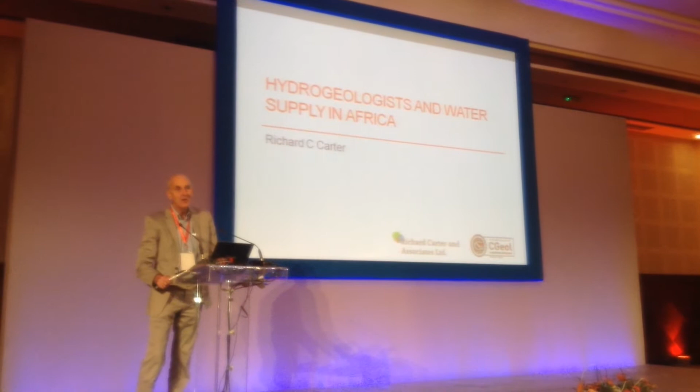Imagine a Minister of Water in Africa, or perhaps a Minister of Finance, or maybe both, asking you all: what is all this, all these posters, all these presentations, what relevance do they have for improving practice and improving policy in my country and in my district? I'm afraid you haven't got either of those people, you're stuck with me, but I'll try and represent them a little bit.

I do find myself rather humbled by the sheer volume of science and experience that we're all surrounded by. And as I get older, I realise how little I know and how the little I know seems to get smaller every day.

Many of the discussions that I've been having so far have reinforced that there are many things that we really don't understand about groundwater, and that makes it quite difficult in some cases to draw out the implications for practice and policy. But that's what I want to try and do, to make some links between the science of groundwater and practice and policy. Sometimes I talk about it as practice and policy in that order, and sometimes policy and practice. It's never quite clear which drives the other.

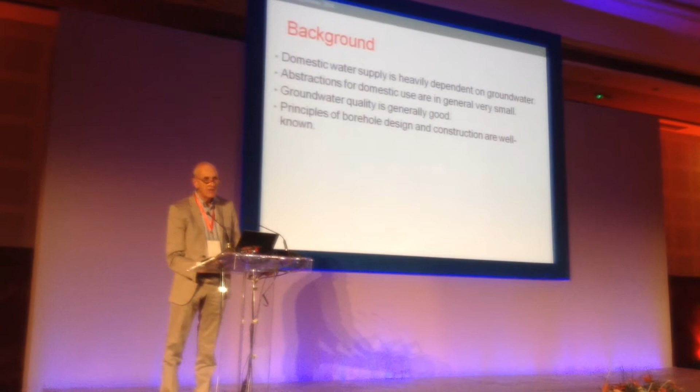In the previous version of this presentation, I had a little animal appearing at this point. We have an advertisement on British television which features a meerkat, you know, one of those little South African animals, sticking its head up and saying, "Simples."

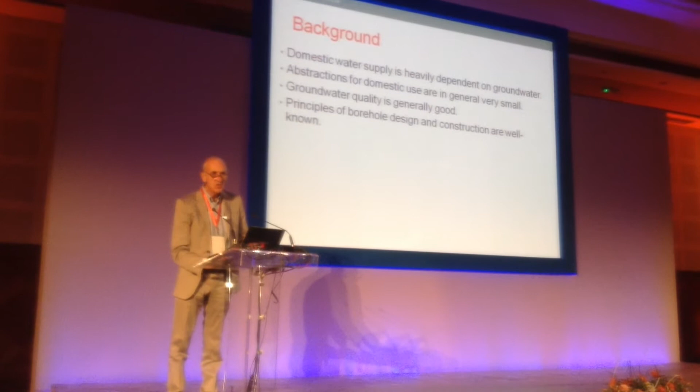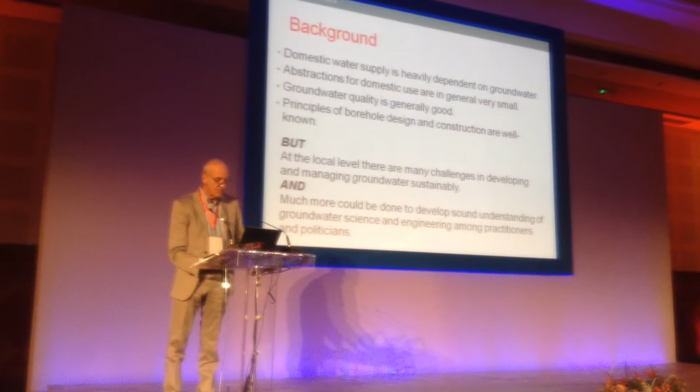It should be simple. All these things are in place, but there are a lot of challenges in developing and managing groundwater for domestic water in Africa. And I think we can do a lot better in communicating groundwater science and improving engineering practice.

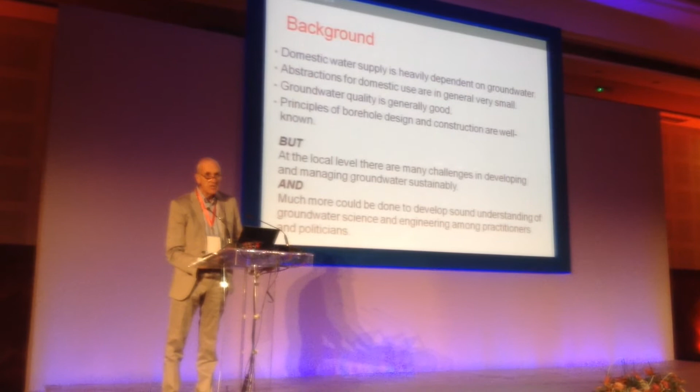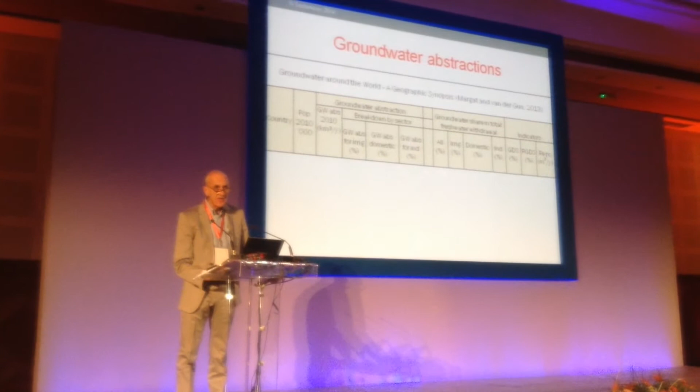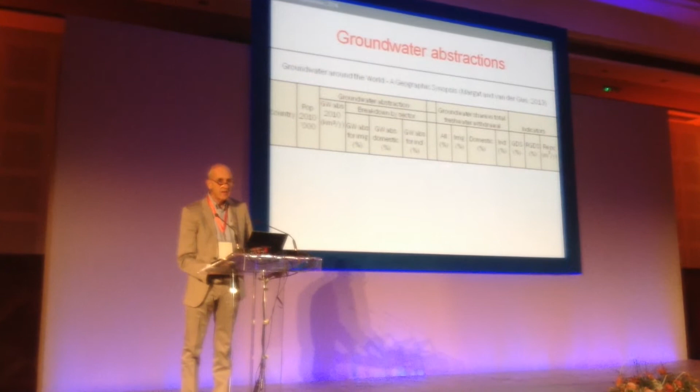A recent publication by Jean Margat and Jacques van der Gun has tried to pull together some data on groundwater abstractions, country by country, breaking it down, disaggregating groundwater abstractions by sector, irrigation, domestic water and industrial water, and examining each of those as their proportion of total freshwater withdrawals, and adding some indicators to do with renewability of groundwater.

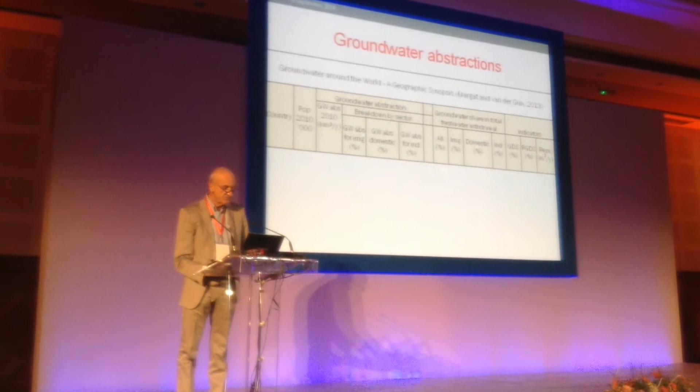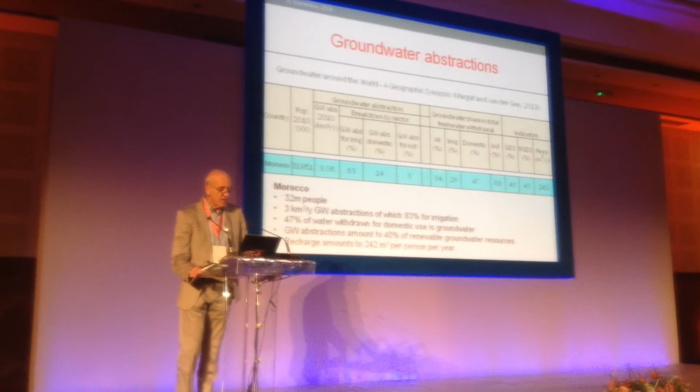As an example here, Morocco, let me just summarize some of the data from Morocco. About 32 million people, extractions of 3 cubic kilometers per year, or thereabouts. More than 80% of that is for irrigation. 47% of the water withdrawn for domestic use comes from groundwater.

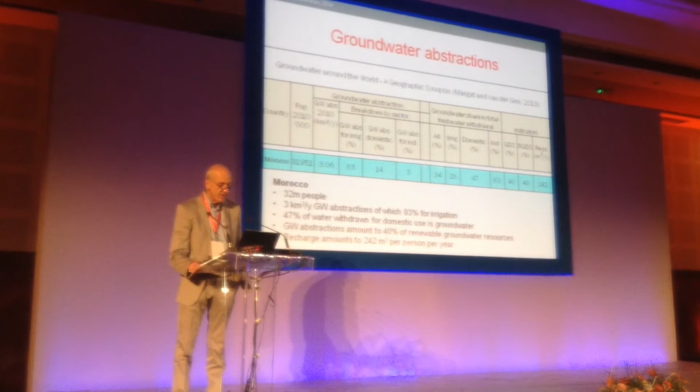And over towards the right-hand side, the groundwater development stress, the GDS figure, 40%, groundwater abstractions amount to about 40% of renewable groundwater sources nationwide. Of course, once you get down to basin level, we're talking of a different situation.

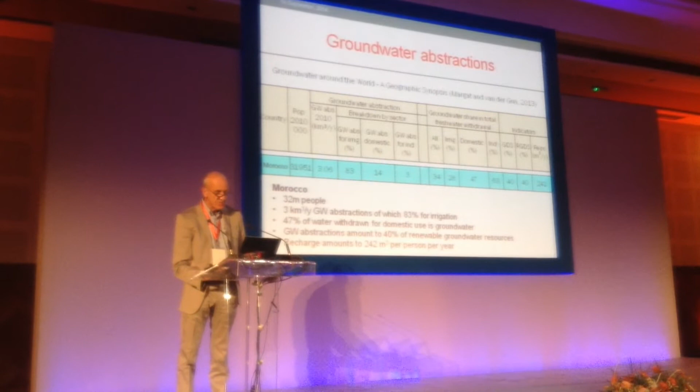Recharge, the far right-hand cell of that matrix shows recharge of about 240 cubic meters per person per year. And if you compare that with a domestic water demand, if people are using 100 litres per day, they would require about 40 cubic metres per year to put that figure into context.

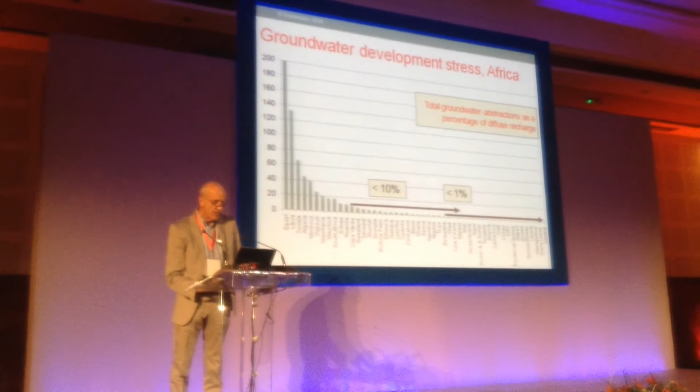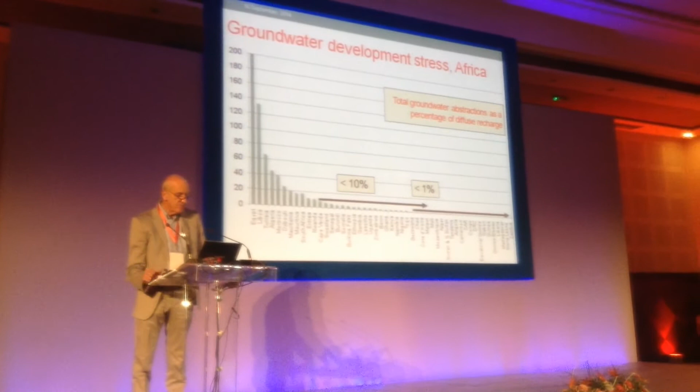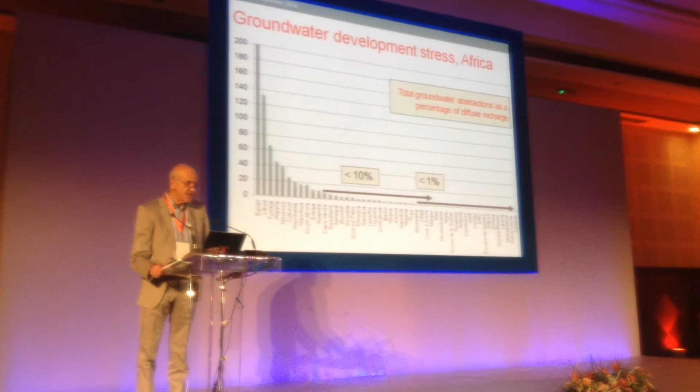Again, this is the development stress and plotting it across Africa, including North Africa. The groundwater development stress is the ratio of groundwater extractions to renewable groundwater. You can see that that on the vertical axis exceeds 100% in Egypt and Libya, and it's still pretty high across North Africa and parts of the Horn of Africa.

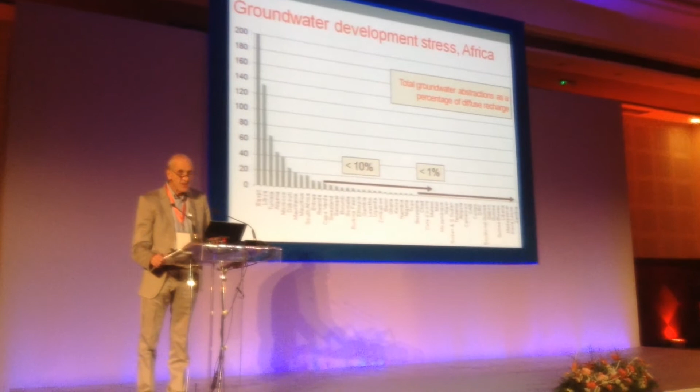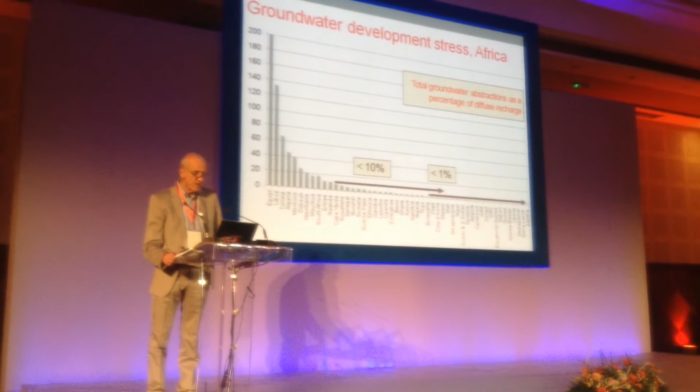But as you move towards the right-hand set of countries, you very quickly get into geographies where the abstractions are less than 10% and progressing to less than 1% of renewable groundwater resources. That doesn't mean that there are not localized problems. I'll come back to that.

As far as domestic water use is concerned, the summary tables in that publication can only disaggregate data for 12 countries in Africa, 2 of which are in North Africa, Morocco and Algeria. However, what the remainder do show is that very few countries in sub-Saharan Africa have domestic groundwater abstractions which exceed more than a very small percentage of recharge.

The exceptions are in semi-arid and arid regions in North and West and Southern Africa, and almost certainly in the Horn, although of course you can see from the map we don't have data for those, disaggregated data.

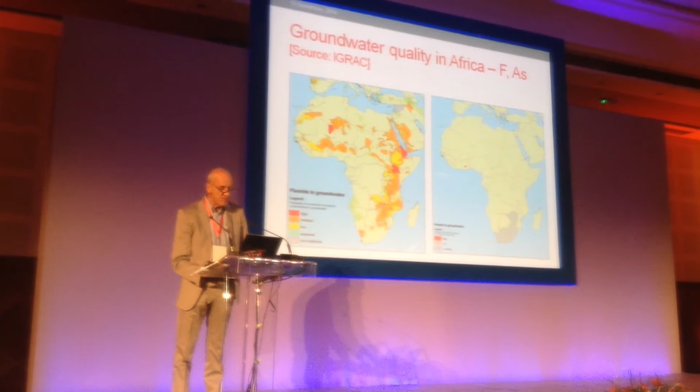A little bit on groundwater quality, a couple of maps here, first of all of fluoride, both from IGRAC. Fluoride in groundwater is a fairly widespread problem, particularly in volcanic areas, the Rift Valley and so on. They're not restricted to the East African Rift. Arsenic is actually a little bit more widespread than this map shows, but so far as we know, not too widespread.

Iron and manganese, I couldn't find any regional maps showing iron content, for example. We know iron is a big issue in groundwater, but a multi-country study carried out in the late 80s concluded that natural iron content in groundwaters in that region was very low, usually less than 1 milligram per litre, and generally less than a third of that. That's at odds with what we observe, but I'll explain why just momentarily.

Outside of West Africa, I find it difficult to generalise about natural iron content. What we do see, though, is that the iron contents in pumped groundwaters, particularly pumped using hand pumps, are often a lot higher, to the point where users reject that water for potable purposes.

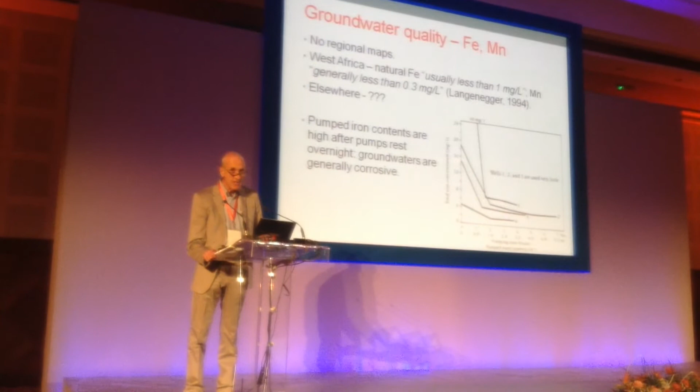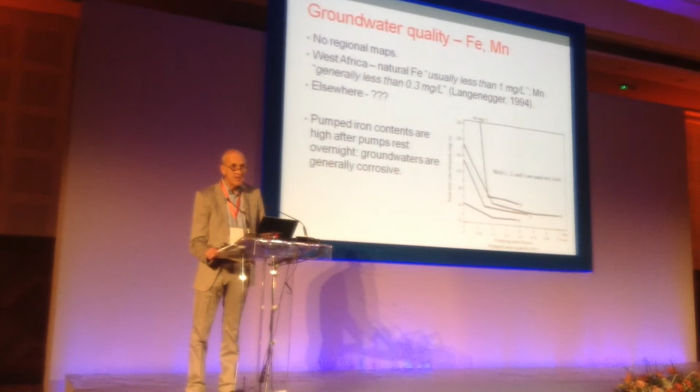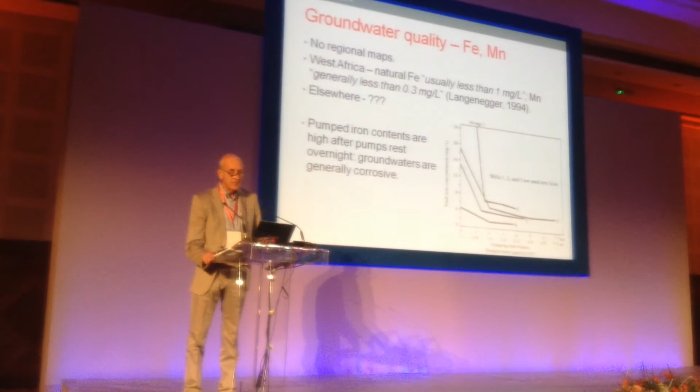The vertical axis here is total iron content, iron concentration, with values ranging up to 60 milligrams per litre. And the bottom axis is the duration of pumping starting early in the morning. And what you can see is that as the borehole is purged, the iron content comes right down. And that's a pretty strong clue that the source is corrosion of galvanized pumping components.

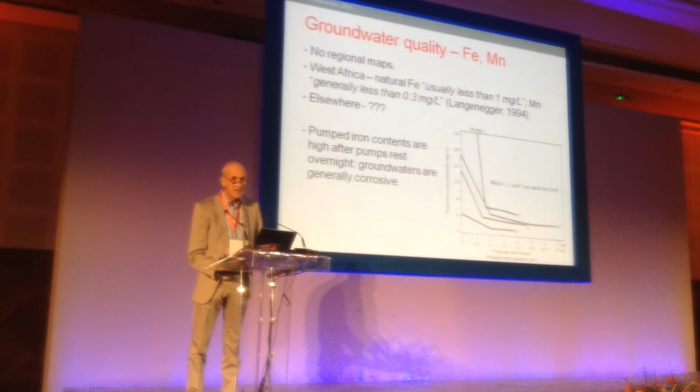And that's been well known now for many years, and yet still common practice is to put pumps into boreholes that are made of galvanized iron components, even where pH is low and groundwaters are known to be corrosive.

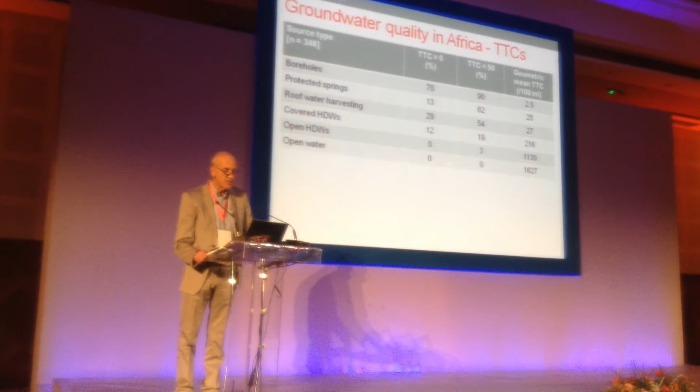Thermotolerant coliforms, fecal coliforms, microbiological water quality. Just one example here of a study that I supervised in East Africa a few years ago, comparing the thermotolerant coliform counts of a number of different water source categories. The first numerical column there shows the percentage of each of those categories having thermotolerant coliform values of 0, clearly the ideal, and the second column, values falling less than the Uganda national standard for untreated supplies, which is a little bit more realistic.

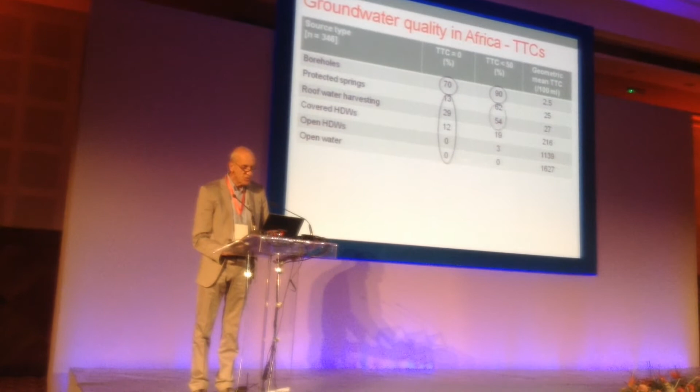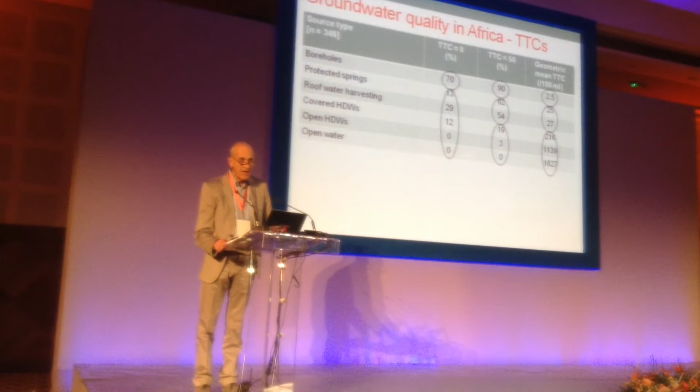But nevertheless, what you see is even with boreholes, which are supposedly drilled, lined, cased, and with sanitary seals, we don't see 100% either falling into the 0 category or the less than 50 category. The others fall into various groupings, and depending on how you want to interpret these, I think it's pretty clear that the bottom 3 categories, both covered and open hand-dug wells and open water sources, are problematic from a potability point of view.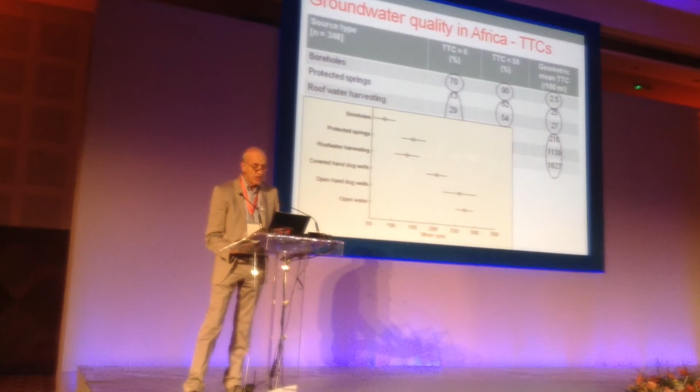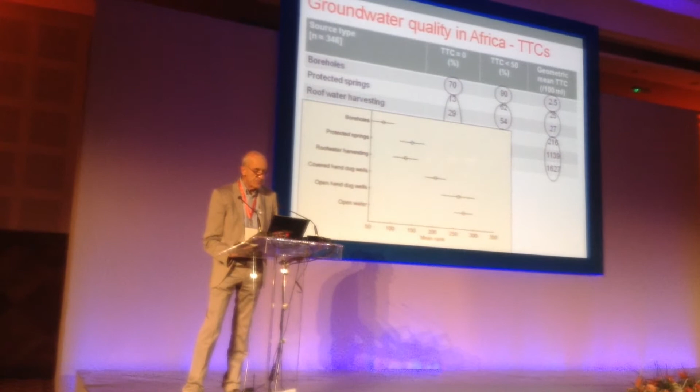If you rank those different water source categories and do some more statistical analysis, you see a pattern which is exactly as you would expect, but the key point, I think, is the non-zero values, even for what are supposed to be improved and safe water points.

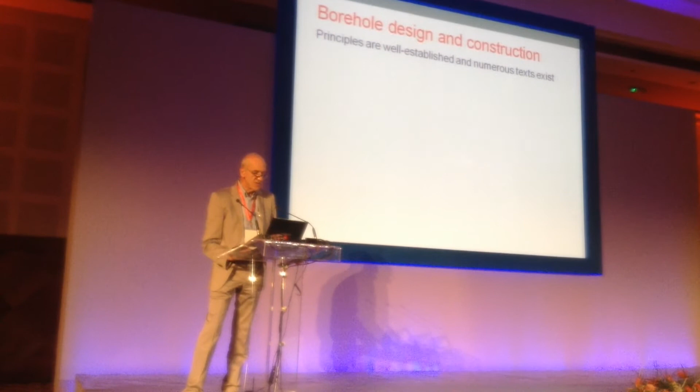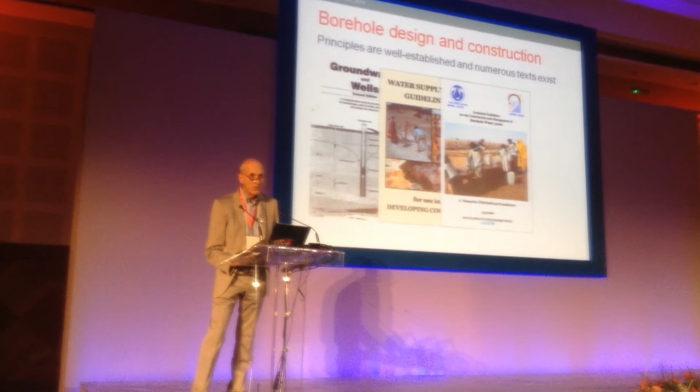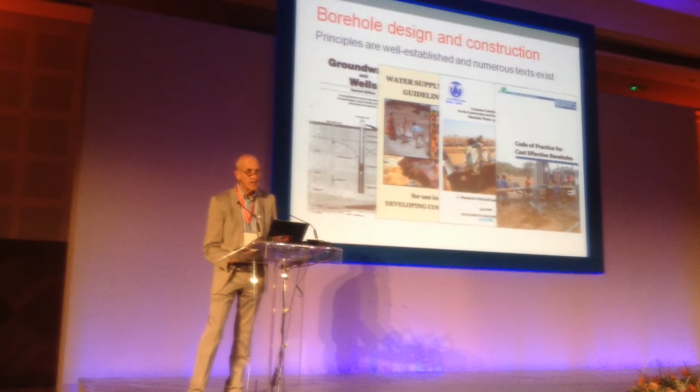Let me move on. We know very well how to design boreholes from even the first edition of Groundwater and Wells, and here the second edition, and various more focused, more country-specific or region-specific guidance, more generic guidance. We know very well how to drill and how to design, how to construct boreholes. So where does all this put us?

In general, what we can say is that there is enough water for basic domestic and small-scale livelihoods purposes, rural water supply from groundwater. Quality is generally good, with a few exceptions, but we do know how to protect source works from fecal contamination, which is, in most cases, the most important thing. And we know how to design and construct boreholes. But what we see is many groundwater sources failing to give a good service or failing, being abandoned prematurely.

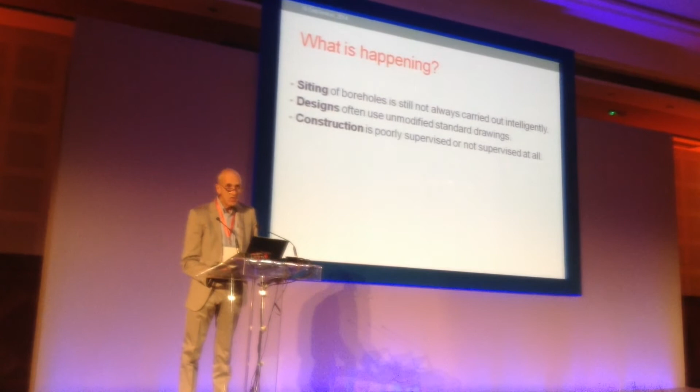And I think, again, those of us who move around Africa and see what's going on, we would say that quite a lot of the borehole siting which is carried out is not done intelligently. Designs are often done using standard drawings, which are then not modified on site. Construction is often not supervised at all, or rather inadequately supervised, and that's another reason for which designs are not modified on site.

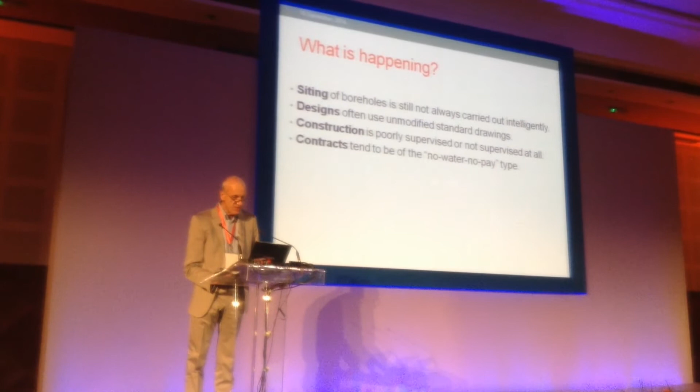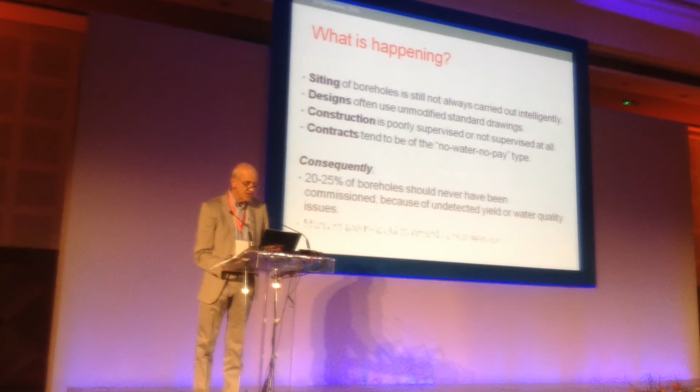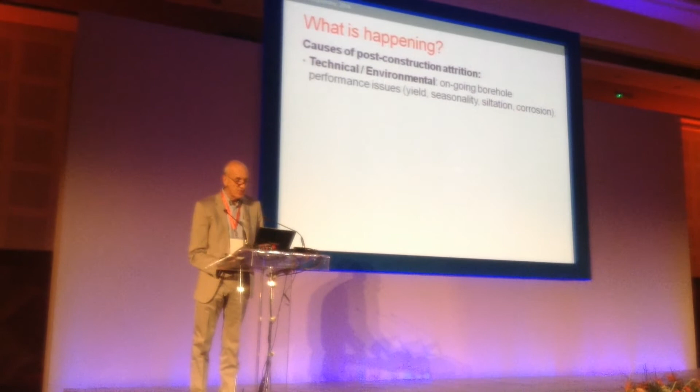I've highlighted there a number of shortcomings in professional practice leading up to the point of delivery of a new water point. If you go beyond that into the post-construction period, why do 3, 4, 5% of boreholes fall out of service every year? Well, ongoing technical and environmental issues to do with water resources, to do with borehole construction, and so on, seasonality. Wider management issues to do with the fact that communities of water users are being expected to manage services that in many cases are unmanageable.

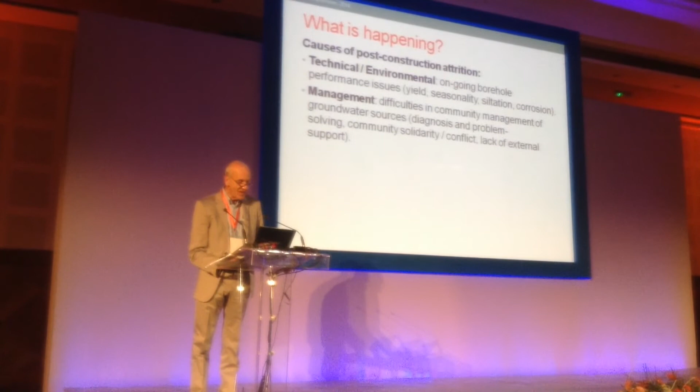And then financial issues to do with the inadequacy of post-construction finance and lack of clarity over who should pay. So you've got the legacy of that poor professional practice, but then inadequate arrangements for management and financing.

And all of these problems that I've highlighted seem to me to be symptoms of a number of underlying causes, which include poor appreciation on the part of politicians and decision makers of the importance of groundwater, and poor understanding of how groundwater works, what are the issues to do with groundwater development and management, both by practitioners and politicians, but also by the general public, and especially the water users who are expected to manage groundwater sources.

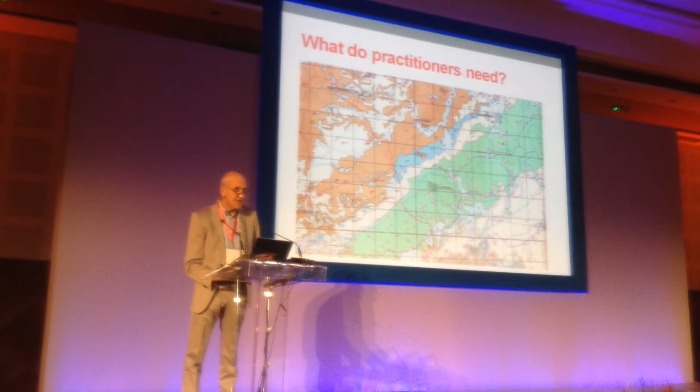Let me go on to just suggest briefly some of the things that I think practitioners need. The district water officer, who should be standing here, needs simplified maps which show rock type, lithology, yes, but particularly in relation to different siting approaches, different drilling techniques that are applicable, that show water levels, expected yields, water quality, and so on. Standard hydrogeological maps, such as this one, are fine for people like us, but for many practitioners in the field, something more like that is more helpful.

Some very simple text. Just to pick an example at random, not sure about sandstone, maybe better chance of success in valleys. Somewhere else, good aquifer, can drill anywhere, hand dug wells possible. Useful, practical, simple information, but accurate too.

What else do practitioners need? They need understanding of groundwater hydrology. How does recharge work? Diffuse recharge, localized recharge. What sort of quantities are we talking about? How do water tables respond to rainfall? And at the end of the rainy season, what does the recession look like and why?

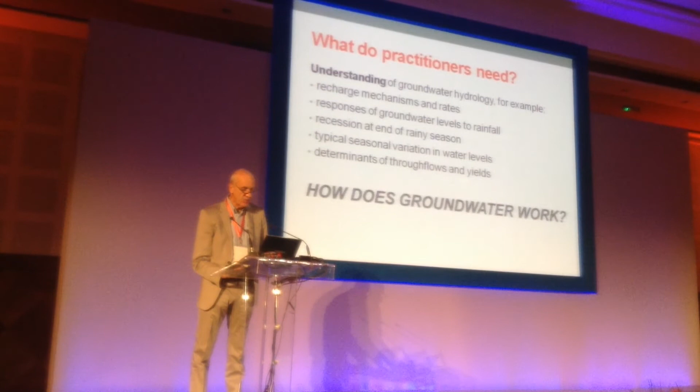A bit more for practitioners of guidance materials. Practical things, siting, how do you do that? Drilling, well construction, supervising contractors, procurement and contract management, costing of boreholes and pricing, monitoring and other subjects. I'll refer again to these in a moment.

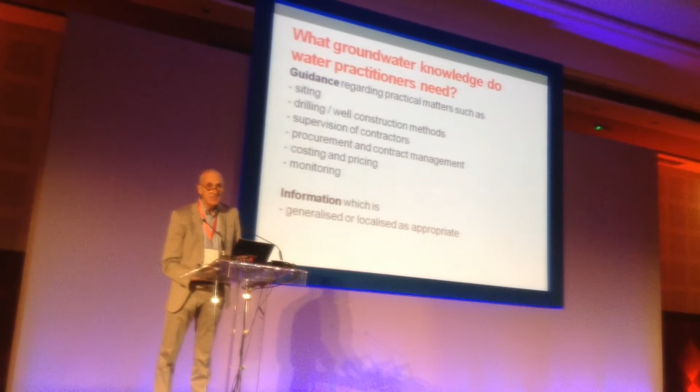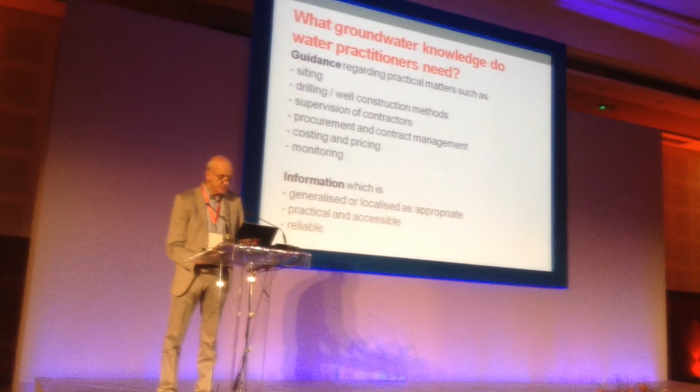It needs to be information which is either generic, if that's appropriate, or localized, if that's needed, but very practical, very accessible and readable, and reliable. In other words, how to.

If it was the Minister of Finance standing here, what does he or she need to know about groundwater? Well, certainly a good, clear understanding of the importance of groundwater. I think we had that demonstrated on Monday morning by the Minister of Water here. But then you would expect the Minister of Water to understand that. Minister of Finance, maybe not.

But its importance as a resource, as a buffer against short-term variability in rainfall and runoff, as a generally good quality resource if it's protected. I think politicians and policymakers need to have some quantitative understanding. How much are we talking about?

And what sort of demands are we talking about from the different sectors, from agriculture and industry, from urban and rural domestic water? What's realistic in terms of development ambitions? The importance of groundwater protection, and the importance of long-term monitoring, which a number of speakers so far in this Congress have drawn attention to.

How do you convince a Minister of Finance of the importance of groundwater monitoring? He or she will say, 50 years of groundwater level monitoring, that's going to cost. But what value does it have for the economy of my country? Can we not do that kind of cost-benefit analysis?

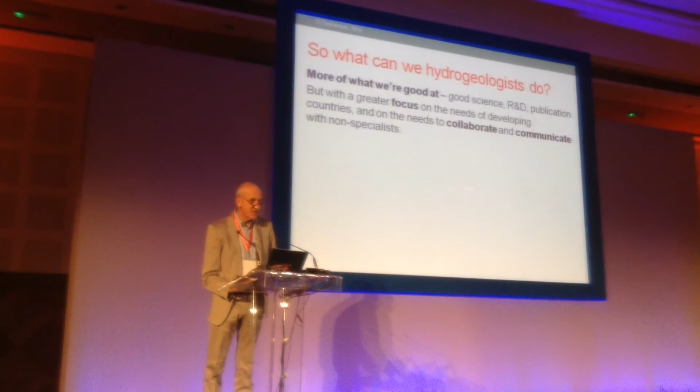So what can we do? I think it starts with what we're good at. We're good at science, we're good at research and development, we're good at publication. But I think what we need to do is to focus more on the needs of developing countries, at least some of us, and on the value of good collaboration and relevant communication between ourselves as specialists and non-specialist practitioners and policymakers.

It means involving practitioners and policymakers in the science. It means versioning what we write, not just writing for a high impact factor journal. Yes, do that, but also writing those much simpler, much more accessible publications that our target audiences can use, especially given the fact that we're working often in non-reading cultures.

It means working with intermediaries, with other specialists, with knowledge brokers, who I'll mention in a moment, with economists and others, and doing the kind of analyses that matter, not to us, but to non-hydrogeologists. Cost-benefit analysis is one example of that.

I'm going to mention here just one example of a new research program which has been running for about a year and will be moving into a further 4-year phase shortly. It's called UPGro, Unlocking the Potential of Groundwater for the Poor. It's a program, it has its own dedicated website.

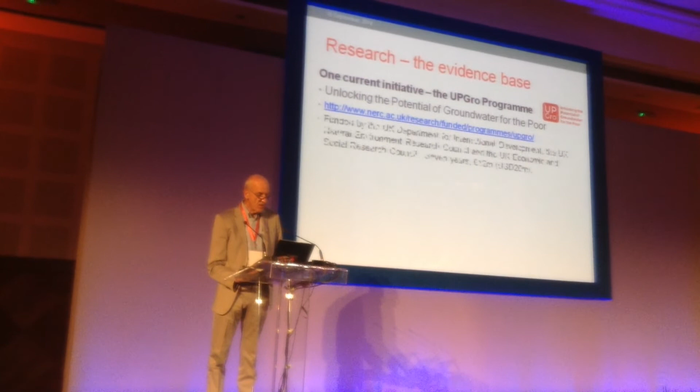It's a program which is funded by the UK government, the Department for International Development, but interestingly together with 2 of the research councils, the ones dealing with the natural environment and the Economic and Social Research Council. It's about a $20 million US program, running over 7 years in total, focused on sub-Saharan Africa. And it's about creating the evidence to get good services to the poor.

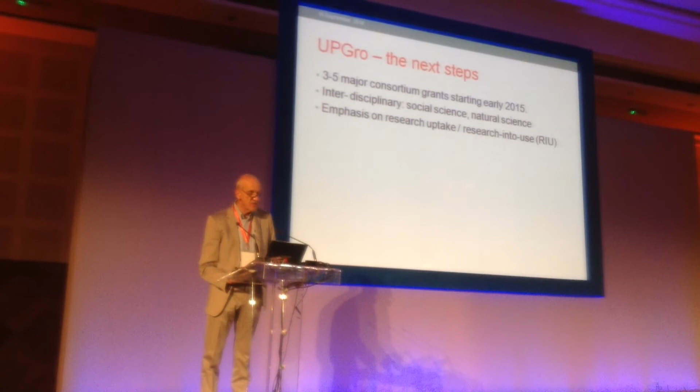There have been 15 or so so-called catalyst projects which have been running, some of them coming to an end, others running on a little bit longer, on different aspects of groundwater spread across the continent. And shortly there will be an award of 3, 4 or 5 major consortium grants which will begin in early 2015.

The big emphasis here is on interdisciplinarity, bringing together the social sciences and the natural sciences, but also research uptake, getting the findings of the research into practice, research into use. This is not easy. I just want to say a few things about interdisciplinarity and research into use. It requires us to get out of our comfort zones and to work with other professions, but also with non-specialists.

As far as interdisciplinarity is concerned, we can do it in different ways. Either I do my hydrogeology, you do your social science, we each write a different chapter of a report and we bolt them together. That's not interdisciplinarity.

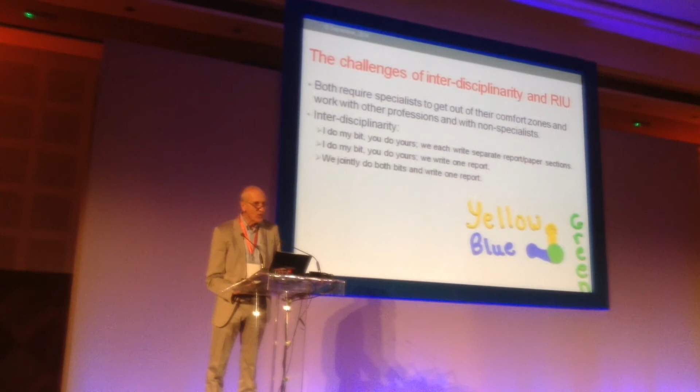Second option is I do my bit of my hydrogeology, you do your social science, and we together write one report. We bring the yellow and the blue together and create some green. That's getting closer. But maybe the third is too much of an ideal, that we jointly do the hydrogeology and the social science.

Similar with research into use. I've heard one or two people at this Congress so far saying, I'm a scientist, I do my research, I hand it over, it's up to the politicians to make the decisions. And that's one way of doing it, but it's not going to have much impact. An alternative is to plan a research into use strategy from the outset, or going even a step further, undertaking the research, the science, together.

An example, a trivial example, is borehole siting. Where should the borehole be located? I think probably most people in this room would say, where there's water. It's obvious. It's not obvious to a social scientist. A social scientist would say, if it's not where people need it, it's not in the right place.

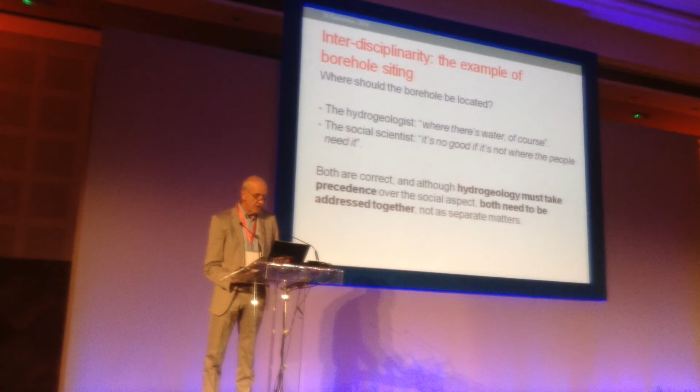And of course, both are correct. In this example, hydrogeology has to take precedence. There's no water, there's no access. But equally, if there's no access from a social point of view, there's no access.

A few thoughts about communication. I came across a series of publications not so long ago which present some quite tricky concepts. Economics, macroeconomics, microeconomics, and statistics, would you believe, in comic book form. Cartoon guides to those subjects. I haven't seen one in groundwater yet. Nor have I seen one of the For Dummies series yet for groundwater.